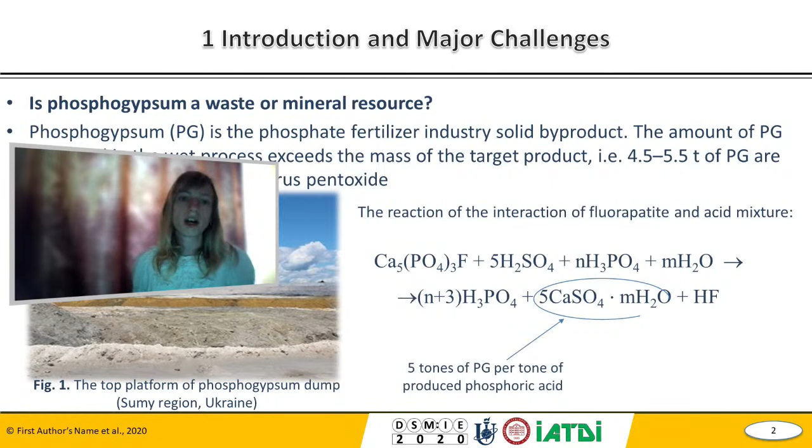I want to note about phosphogypsum as a waste or mineral resource, how we can use this type of byproduct. Especially phosphogypsum, a phosphate fertilizer industry solid byproduct. The amount of phosphogypsum grows rapidly, and now in Ukraine especially it is more than 45 million tons of phosphogypsum situated over large territories in dumps. This is not only a problem for Ukraine but now worldwide, in 42 countries phosphogypsum is dumped, and recycling of these byproducts is only maybe 10%. So it's an actual task to recycle such type of byproducts.

And now our research - next slide please - you can show aims and research tasks. Research aims: the modeling of the possibility of E. coli growth under mediums that contain different phosphogypsum doses, for environment protection purposes.

We chose E. coli bacteria as a biological object because it has very interesting industrial applications in different types of bioprocesses, especially in environment protection systems, bioremediation technologies, wastewater treatment, and destruction of hydrocarbons. So we're using this type of biological object with different phosphogypsum doses included in the mediums.

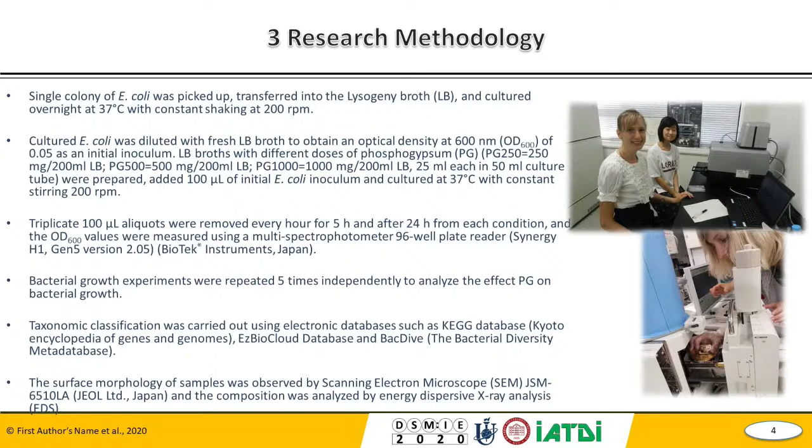It should be noted that phosphogypsum has some specific chemical features that firstly influence the evaluation of the effect on optical density estimation, because it's not very soluble, so it impacts the process of growth estimation for E. coli. Next slide please - figure 3 presents images of phosphogypsum samples and EDS spectra of the fields, from which we can understand these effects are not very easy to interpret and involve some progression and difficult conditions.

I hope it's okay and you can hear me and see my presentation. Yes?

Yes, of course. So we see the structures of phosphogypsum samples, and in these structures, gypsum crystals and silicates or aluminosilicates are included. Analysis of mineral composition is most important. Phosphorus, sulfur, calcium are presented in the phosphogypsum samples, and some contamination can be metals, ferrum, cuprum.

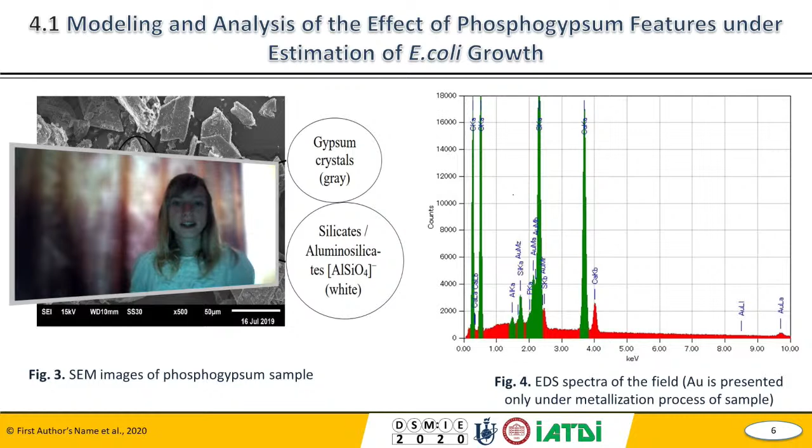What does it mean? Phosphogypsum components can be used by E. coli for its growth. It's not only precipitation in the dump.

Please show the next slide. Developing a methodological approach for estimating bacterial growth under a medium that includes phosphogypsum. For this estimation, it's needed to analyze bioinformation databases to understand the metabolic pathway of phosphogypsum conversions. This conversion is especially important to understand how bacterial growth includes these elements from phosphogypsum for safety, for nutrients, and to identify some enzyme systems involved in these processes.

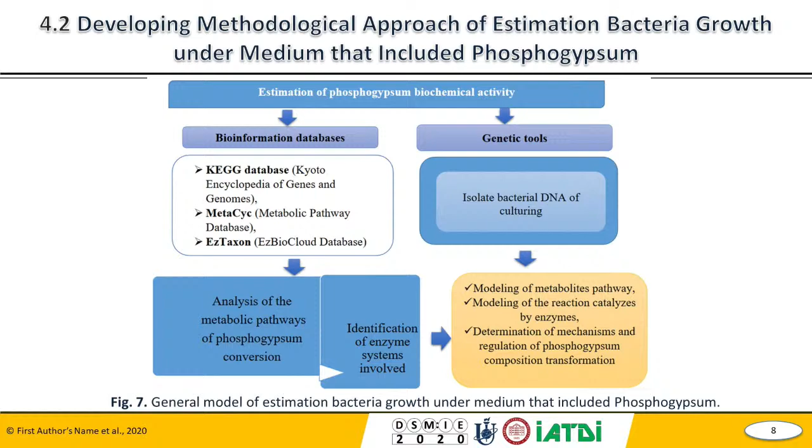So in general, if we go to the next slide, please go to the next slide. Conclusions. We have some very important summarized information and results.

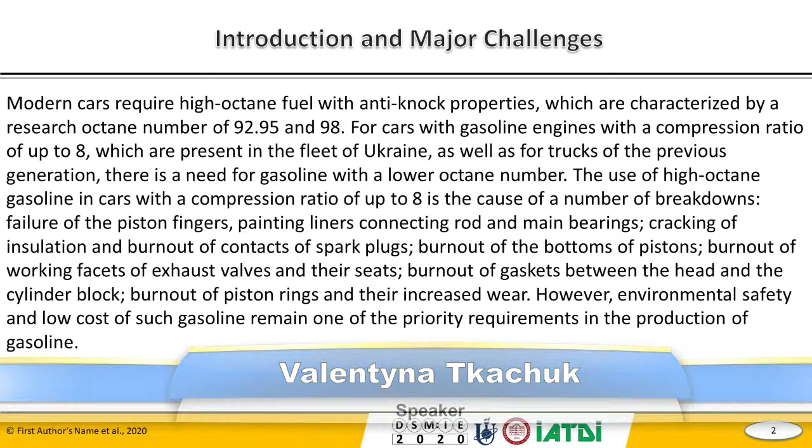The purpose of this work is to assess the effect of bioadditives on the physical and chemical properties of gasoline fractions obtained from various oils, to determine the necessary amount of bioadditives, and to achieve an octane number of 80. Estimation of parameters of operational properties for mixed fuels is performed using standard methods of investigation of physical and chemical properties of fuels, which are standard for both oil and alternative fuels.

The main advantage of gasoline-methanol fuels is the reduction of nitrogen oxides, carbon monoxide, and other harmful substances in the exhaust gases of cars. However, the use of methanol in many countries is prohibited due to its high toxicity, volatility, and increased hygroscopicity, which also creates a number of technical difficulties when using alcohol-gasoline mixtures.

Bioethanol is a less hygroscopic product, which has more heat of combustion and less heat of evaporation. It is significantly less toxic than methanol. Its advantage also lies in the fact that it is made from renewable raw materials. However, ethanol has a number of disadvantages: absolute ethanol is hygroscopic, though to a lesser extent than methanol, corrosive, and negatively affects rubber and plastic parts.

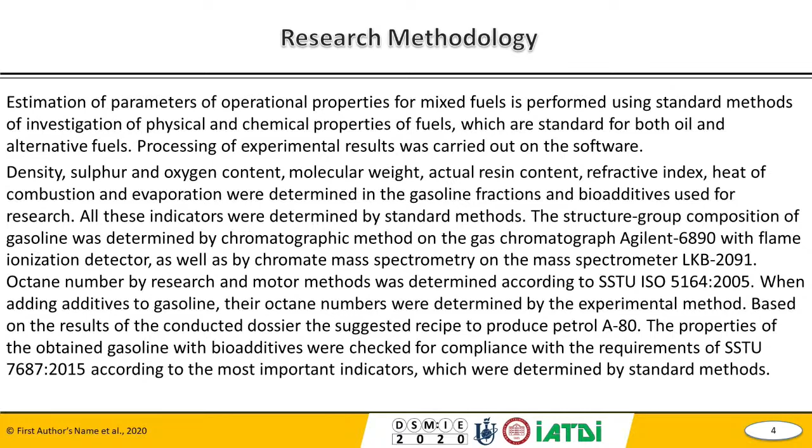Biobutanol can completely replace gasoline in internal combustion engines. In terms of technical characteristics, biobutanol is superior to ethanol: its heat of combustion is 25% greater than that of ethanol and 10% greater than that of gasoline. It is safe to use because it evaporates 6 times less than ethanol and is 13.5 times less volatile than gasoline. It does not cause corrosion.

Butanol has a low saturated vapor pressure and its mixture with gasoline is not as hygroscopic. It provides better fuel economy than gasoline-ethanol blends and will also provide lower greenhouse gas emissions into the atmosphere. However, obtaining this type of fuel is quite difficult. According to analysts, butanol can become an important part of the fuel market for transport, but currently its production is at the initial stage of development.

Isopropanol is characterized by a high maximum allowable concentration and octane rating values, and has good physical stability in mixtures with gasoline, also providing physical stability of gasoline-ethanol mixtures. The addition of 6% isopropanol increases the octane number by the motor method of straight-run fraction of gasoline by 13. And the octane number...

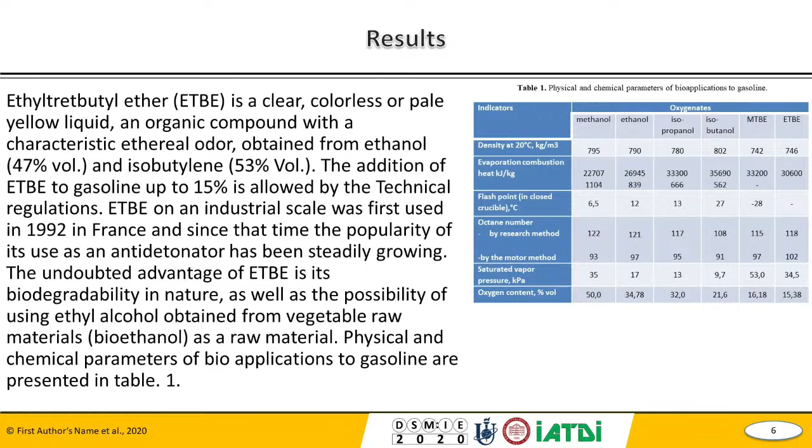Next slide. The above-mentioned bio-applications were added to straight-run gasoline in amounts reaching an octane number of 80. The results are represented in Table 2. Optimal formulations of low-octane gasoline with various bio-applications are proposed based on the prices of the components of such mixtures and the requirements for their quality.

Next slide. The lowest cost will be in a mixture of straight-run gasoline and isobutanol, despite the fact that its content in the mixture is the highest.

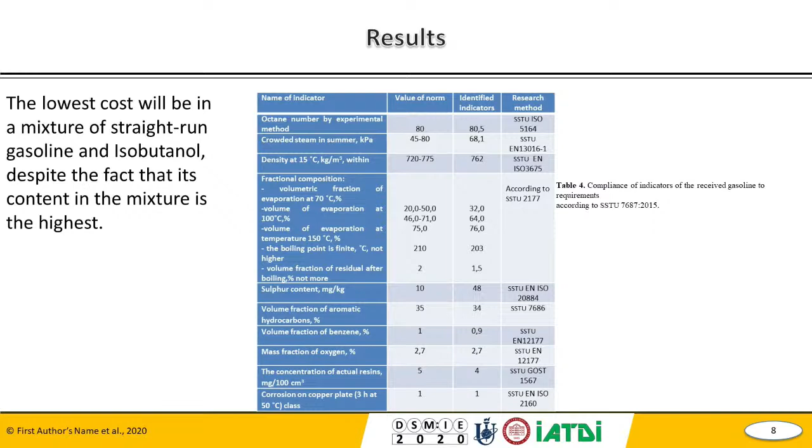Next slide. Optimal formulations of low-octane gasoline with various bio-applications are proposed based on the prices of the components of such mixtures and the requirements for their quality. The lowest cost was in a mixture of straight-run gasoline and isobutanol, despite the fact that its content in the mixture is the highest. The amount of isobutanol in the composite mixture should be left at 4%.

MTBE in the amount of 10%, then the total oxygen content will be within acceptable norms. The content of reformate in the mixture is set at 29%.

Analyzing the physical and chemical parameters of the resultant gasoline mixture, we concluded that this type of fuel meets the requirements of SSTU 7687:2015, that is, it can be used in gasoline engines of motor vehicles. Thank you for your attention.

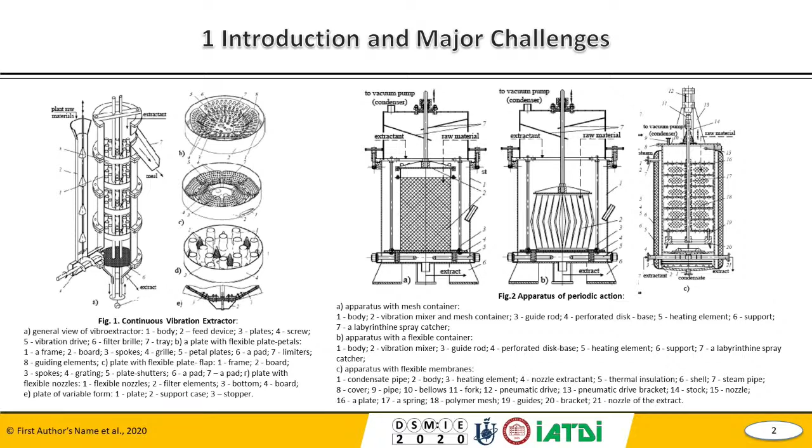Next slide. This picture shows a number of vibroextractors of periodic and continuous action developed at our department.

Vibratory extraction is a relatively new technological process. Its general theory is complex and still in its early stages of development. Therefore, the task was to substantiate the influence of low frequency mechanical oscillation generated by the drive system on the energy consumption in the conditions of vibration extraction of raw materials, and to establish regularities of how that changes depending on the design and mode parameters of the apparatus.

Next slide. Research methods include experimental and analytical modeling.

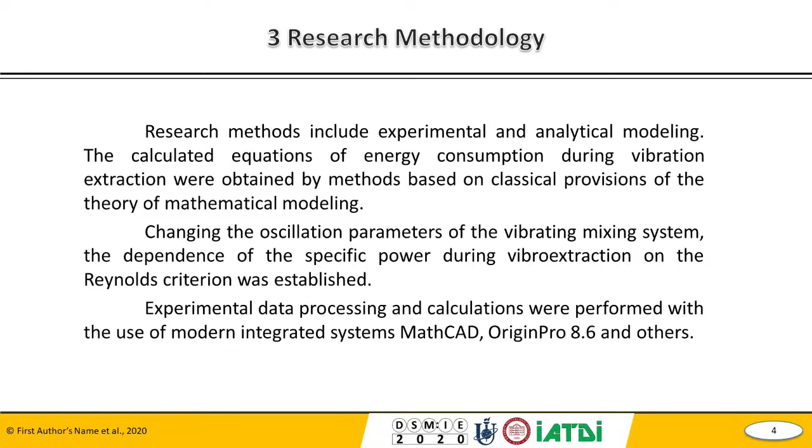The power required to perform work during vibration mixing was determined by the electrical method, taking into account the losses on the active resistance of the motor, given by the equation.

Next, on this poster we can see the scheme of the continuous vibration extractor.

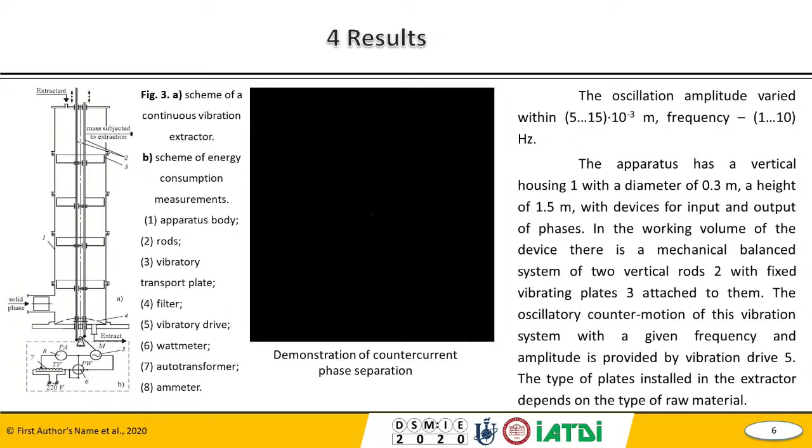The principle of operation of the device is demonstrated by the film. Plant material is fed through the loading device under the bottom plate. Under the influence of the vibrating plate and due to the difference of hydraulic resistance of the nozzles, it moves upward. The extractant is fed to the upper plate and discharged through the device.

Next, on this poster we can see the scheme of a transport-separation plate, and the scheme of movement of a working stream in transport and filtering elements.

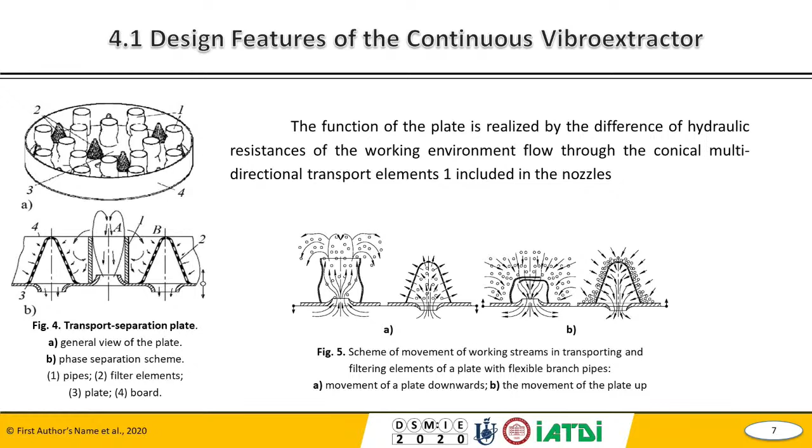The total energy consumption for the processes can be determined by the equation.

Investigation of the influence of regime parameters of the device on energy consumption. It's necessary to note that the turbulent pulsating flow generated by vibrating elements is determined by the energy parameter, and creates optimal hydrodynamic conditions for counterflow mass exchange due to intensive micromixing in the cross section of the working volume of the apparatus, which minimizes longitudinal mass exchange, while extremely high turbulence in the zone of the plate develops a larger interface, providing conditions for intensive mass exchange.

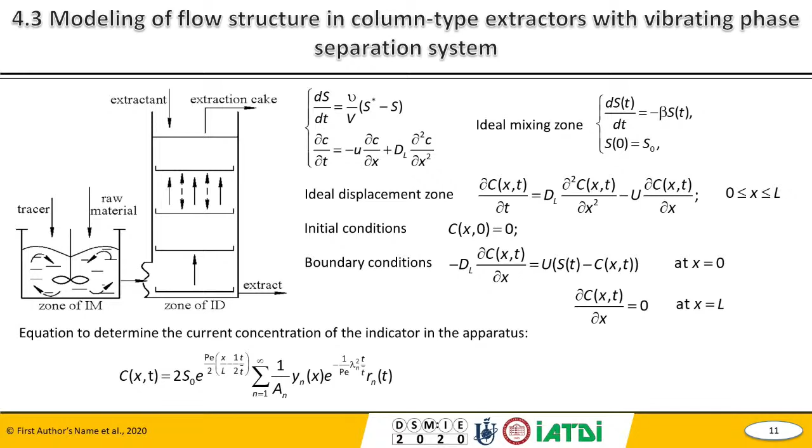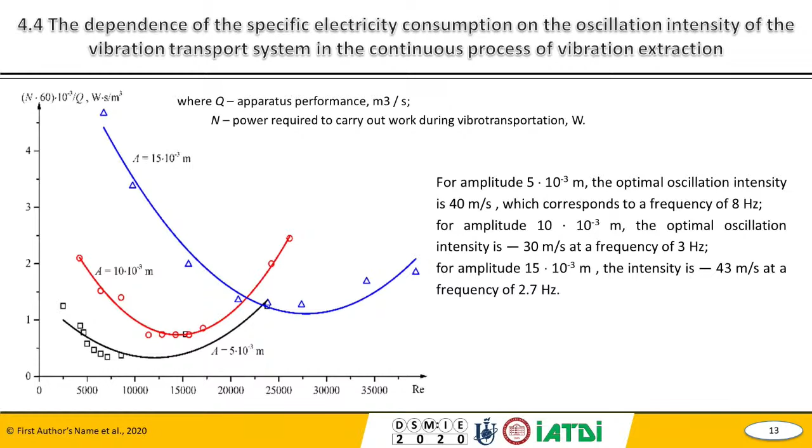Thank you, dear Professor Zavyalov, for the comprehensive theoretical and experimental research results. Your contribution to our conference series is outstanding. Just for information, last year Professor Zavyalov delivered a keynote speech. We highly appreciate his contributions.

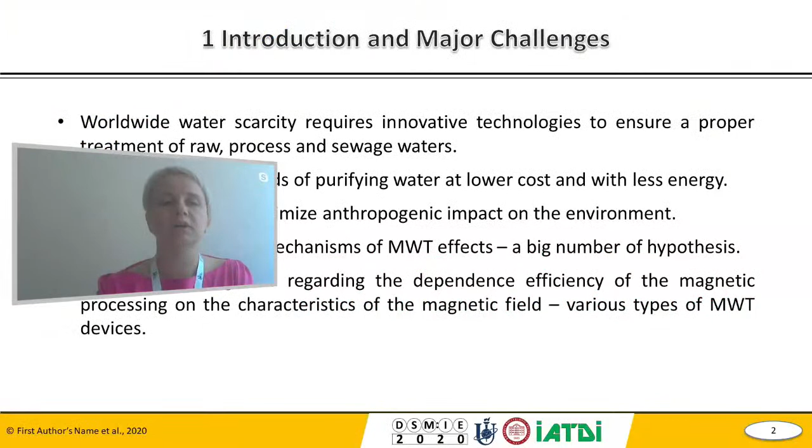Today's situation all over the world is alarming regarding great water scarcity, and this problem is relevant for all countries, both for Ukraine, Poland, and any country in the world. It requires innovative technologies to ensure proper treatment of raw, processed, or sewage waters.

To solve this problem, we need robust methods of purifying water at lower cost and with less energy, while minimizing anthropogenic impact on the environment. Magnetic water treatment is one of these promising methods. This technology isn't new, but it stays relevant.

Today, magnetic processing is widely used in environmental protection processes in European countries and America. But the main problem of magnetic water treatment implementation is the lack of studies on the mechanism of MWT effects. The magnetic field has influence on the chemical properties of water, on scale formation and morphology. It can also modify detergency and mineral fouling, and accelerate coagulation of scale-forming particles.

Results of different studies and practical experiments applying MWT prove that the effects of magnetic water treatment efficiency do not increase in proportion with the magnetic induction.

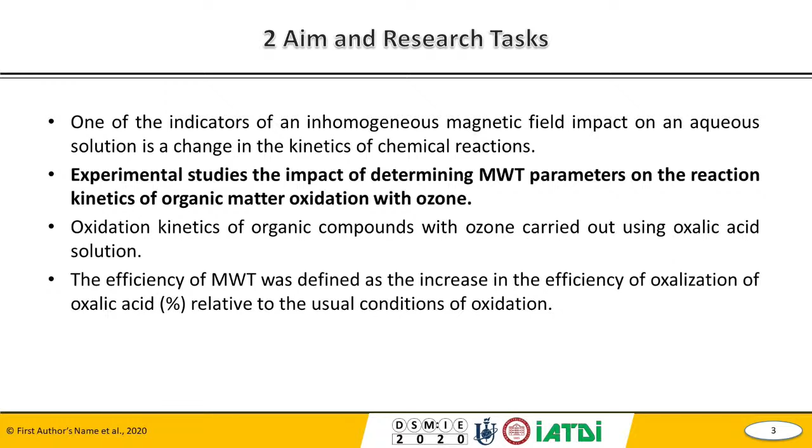For the experimental studies, a laboratory stand was made. The working solution of oxalic acid is pretreated in the magnetic field. As a result, there are physical-chemical changes in the solution, which affects the kinetics of further reactions. After the magnetic pretreatment, the solution is fed into the bubble column for the common process of ozonation.

A series of experiments were carried out according to a similar process scheme. The effect of each of the defined mode parameters was studied independently.

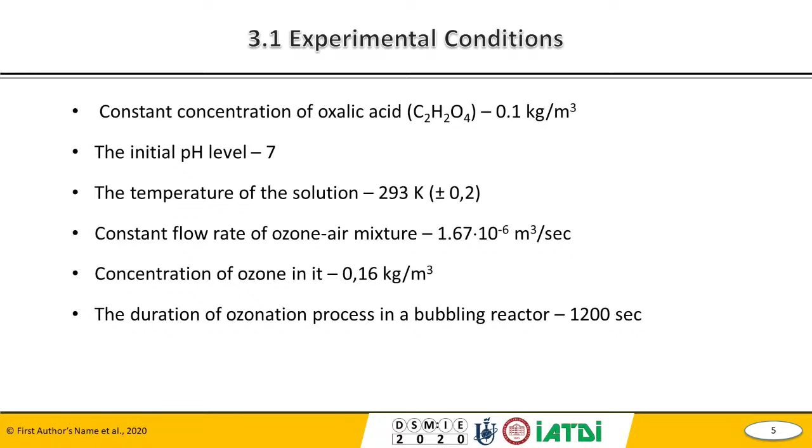The efficiency of magnetic water treatment depends on the processing time and the speed of the solution in the magnetic field. Such dependencies are complicated by design parameters of MWT devices, such as placement of magnets and the length of the section with the magnetic induction drops.

So the influence of the rate of magnetic induction change on the efficiency of magnetic water treatment was analyzed considering all these parameters and one mode parameter, the speed of the aqueous solution. The dependence of magnetic water treatment efficiency on the rate of magnetic induction changes, with consideration of the total duration of the process, was studied by the largest increase in the oxidation efficiency of oxalic acid with ozone.

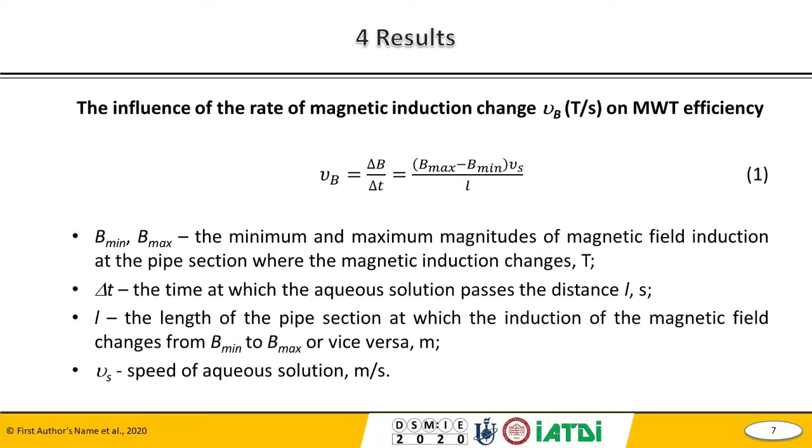The results of the control experiment were based on the oxidation of oxalic acid by ozone after passing the solution through the magnetic water treatment device without switching on the magnetic field.

The efficiency of magnetic water treatment under duration from 0.5 to 1 second does not increase monotonically with increasing value of magnetic induction change, and reaches its maximum in the range from 0.4 to 0.8 Tesla per second. The efficiency decreased due to higher magnitudes of magnetic induction, even with constant other processing factors, indicating the complexity of the relationship between efficiency and magnitude of magnetic induction.

The efficiency of magnetic water treatment also does not increase monotonically with increasing duration of the process. At constant values of magnetic induction change, increasing the duration of treatment from 0.25 to 0.5 seconds dramatically increases the oxidation efficiency of oxalic acid. At processing time from 0.5 to 1 second, the oxidation efficiency does not increase significantly, and further increase in duration is technically unreasonable.

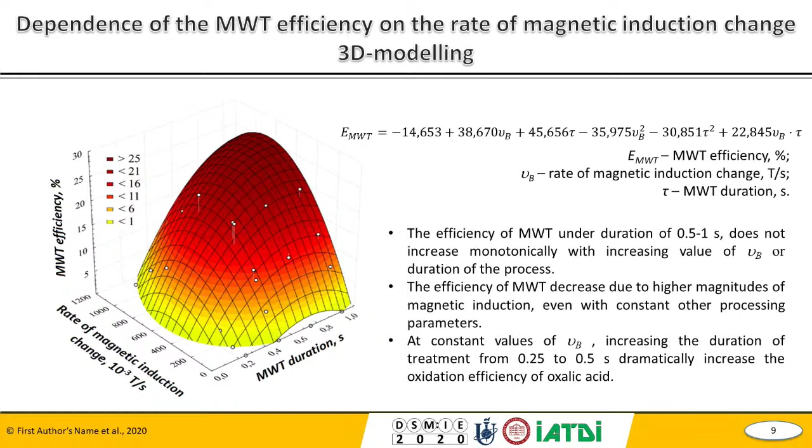The duration of the magnetic treatment has a significant effect on the intensity of the effects, and efficiency decreases using higher magnitudes of magnetic induction. Increasing kinetics of chemical reaction after magnetic water treatment can be widely used in environmental protection technologies.

It reduces reagent needs and can increase the efficiency of purification of reagent treatment process, and it can reduce the deposition on heat exchange surfaces, and help remove suspended particles from contaminated water during coagulation, flotation, or filtration processes.

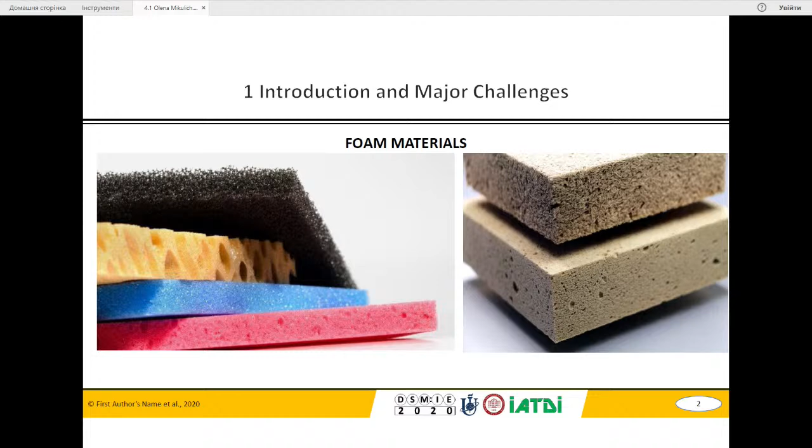Next slide, please. More studies of the effects of different types of loads on such materials are experimental. Therefore, the problem of developing a theoretical method of investigation of time variable load influence on the strength state of foam materials with defects is very important.

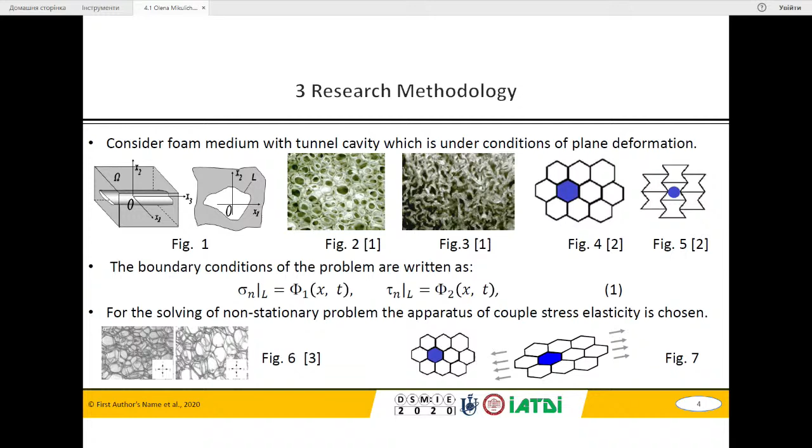Next slide, please. The motion equation in the framework of couple stress elasticity is written in form 2.

We write the displacement vector as a sum of potential and vortex functions and substitute it in equation 2. We obtain two equations of hyperbolic and parabolic type in form 3.

Using the Fourier transform for equation 3 and using the presentation for function psi, we obtain equations 4, on the basis of which we write the values of speed of shear and rotation waves in the framework of couple stress elasticity. Next slide, please.

The Fourier transform for displacement was chosen in form 5, satisfying the Fourier transforms of boundary condition 1. We obtain the system of integral equations 6 and 7, where we separate the singularities in the integration function for small values of the argument and apply Plemelj-Sokhotski formulas for limiting transition.

For the numerical solution of the system of integral equations, an algorithm was used based on the mechanical quadrature method and collocation method. Next slide, please.

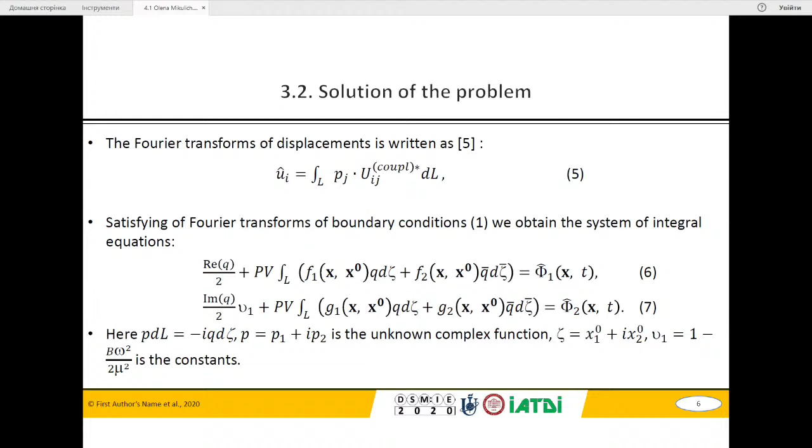For determining the hoop dynamic stresses on the boundary of the defect in foam media, we built an analytical presentation in integral form, equation 8, and for determination and investigation of the original dynamic hoop stresses, we use discrete Fourier transforms. Next slide, please.

Using the developed approach, we investigate the effect of a shock wave on the dynamic stress state of negative and positive Poisson medium with tunnel cavity, according to the model of problems in figure 8.

For numerical calculation, we use the elastic constants obtained by Vox, Rueger, and Lakes, required to describe an isotropic Cosserat elastic solid. Structures of positive and negative Poisson foam are shown in figures 9 and 10, and values of these elastic constants are presented in the slide.

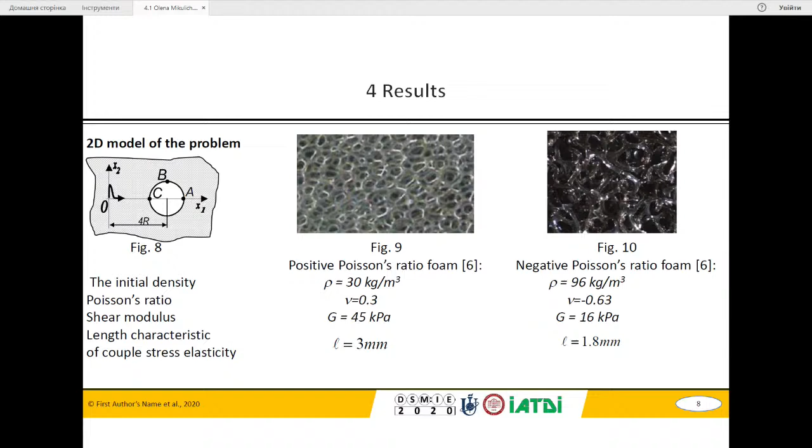Foam with positive Poisson ratio was modeled using cellular elements. Foam media with negative Poisson ratio was modeled using reentrant elements.

Comparing the numerical results shows that the maximum values of normalized hoop stresses at the boundary of the cavity are smaller by 2.4 times in material with negative Poisson ratio than in materials with positive Poisson ratio. Besides, the distribution of hoop stresses along the boundary of the cavity is substantially different for materials with negative Poisson ratio.

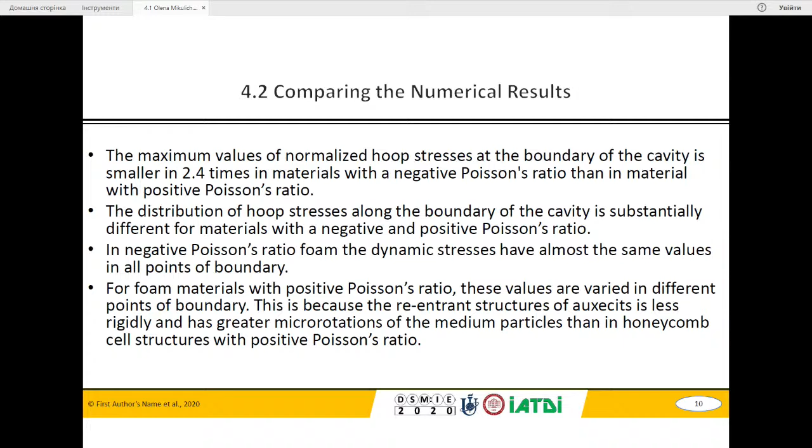All mentioned results of the comparing numerical calculation of dynamic hoop stress are presented in this slide.

Second, based on numerical calculation, the dynamic stress state of structurally inhomogeneous materials depends not only on physical characteristics of the medium, such as density and Young's modulus, but also on internal structure, whose influence is determined by the Poisson ratio.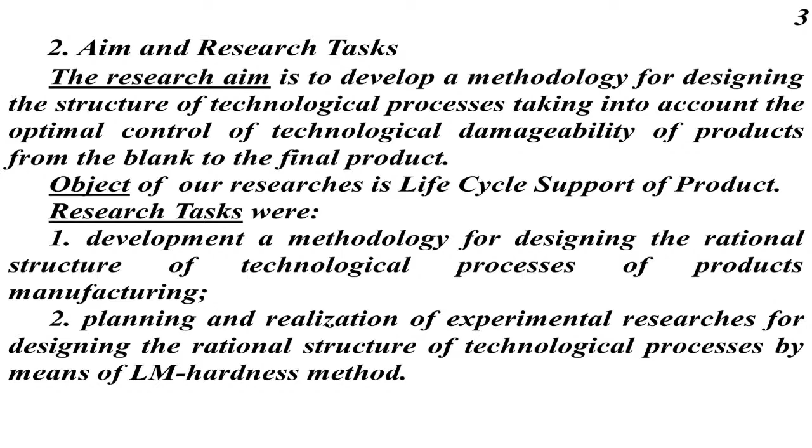The rational structure of technological process is analyzed by means of the LM-hardness method. We use the LM-hardness method to analyze the physical heterogeneity of the blank material structure. Next slide, please.

According to this method, the degree of dispersion of the characteristic of the material and structure state, and material mechanical properties after operation time at various stress levels, is taken from the measurement results performed by identical devices and identical conditions, rather than the absolute value, is used as a parameter of damageability.

The scattering of the measurement results performed by identical devices and identical conditions is more representative regarding the correlation of the mechanical properties of the material and the structure state than the absolute values of the characteristic.

This method is easy to implement using hardness as a mechanical characteristic. The hardness value is used for indirect evaluation of properties. Homogeneity is the parameter that integrally characterizes the state of the material during processing, based on the results of hardness measurements.

Homogeneity is estimated by the Weibull coefficient M. A higher value of the coefficient M corresponds to lower hardness dispersion and a lower degree of damageability. We propose to use the technological damageability W, described by means of energy approaches to the process of damage accumulation, as a criterion for analyzing the process during blank machining.

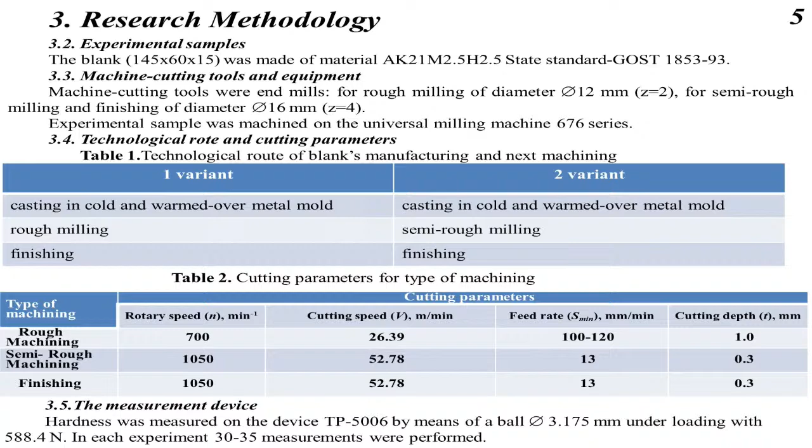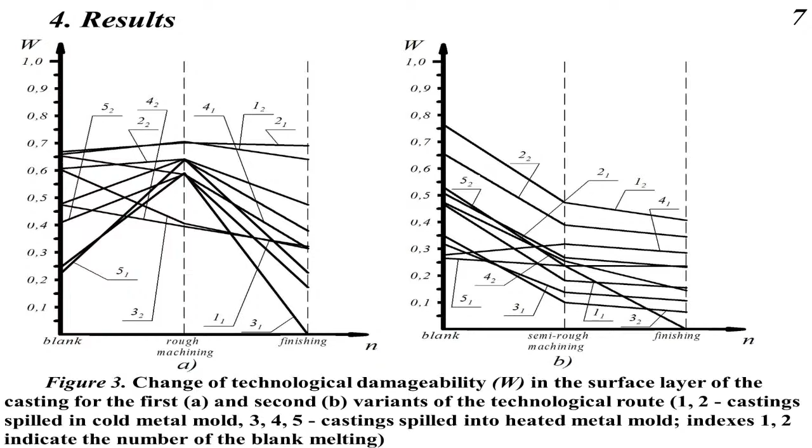Next slide, please. The main results you can see on this slide and another slide.

We propose to design the rational structure of the technological process of product manufacturing by means of the LM hardness method. Using the technological damageability W as a criterion for analysis during blank's machining, we can choose the optimal technological operation during process manufacturing, determine the layer of product material for cutting during manufacturing, and predict the behavior of product material during substages and stages of the life cycle support of the product.

Next slide, please. The main conclusion you can see in this slide.

Technological damages on the surface layer of the part during blanking operations and after machining should be analyzed by the hardness dispersion. We propose to use the technological damageability, described by energy approaches to the process of accumulation of damage, for the process analyzed during blank's machining.

Further research should be carried out for a wider nomenclature of products and materials to introduce the proposed technique, into the practice of modern mechanical engineering production.

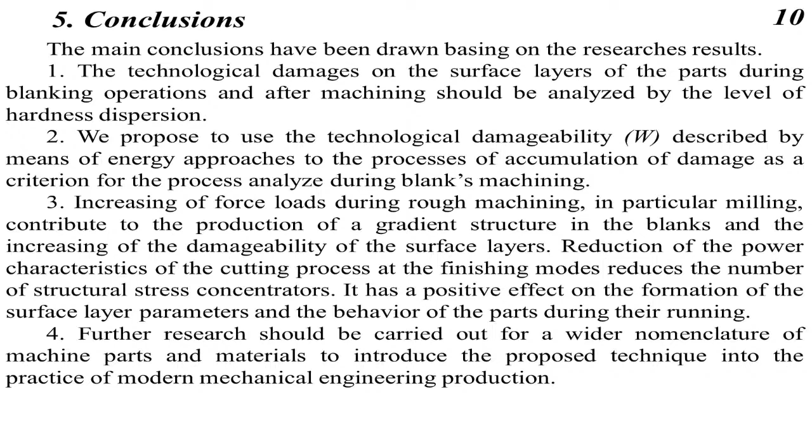The presentation is finishing. Thank you for your attention.

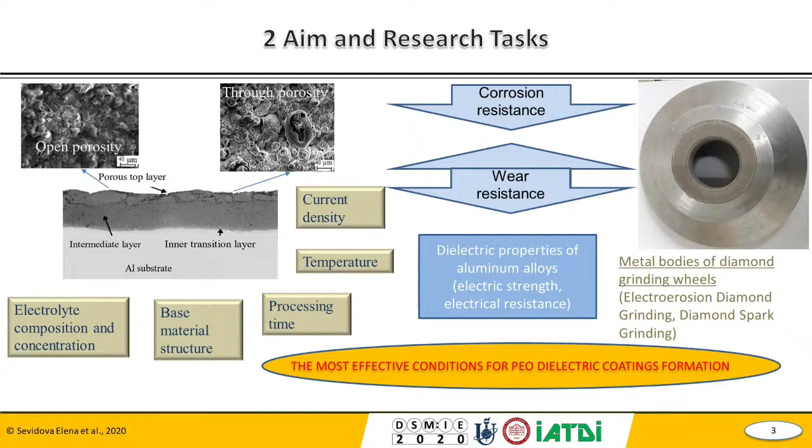Our coating thickness was measured with an eddy current thickness gauge. The results were from 30 to 45 micrometers. The most important thing for us was the indication: how can we see porosity?

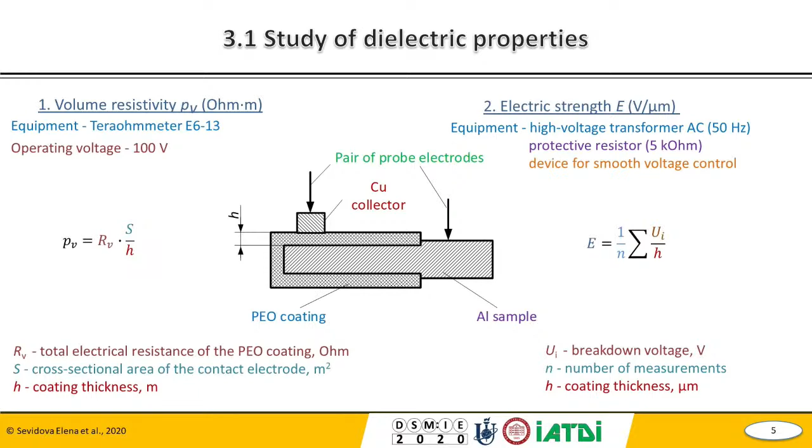After such research, we started to research our dielectric properties.

Please, slide 8. It can be also seen that there is a good correlation between these measurements, our morphology, and the dielectric properties.

For example, the lowest volume resistivity we have is in samples with the biggest and largest amount of through-porosity.

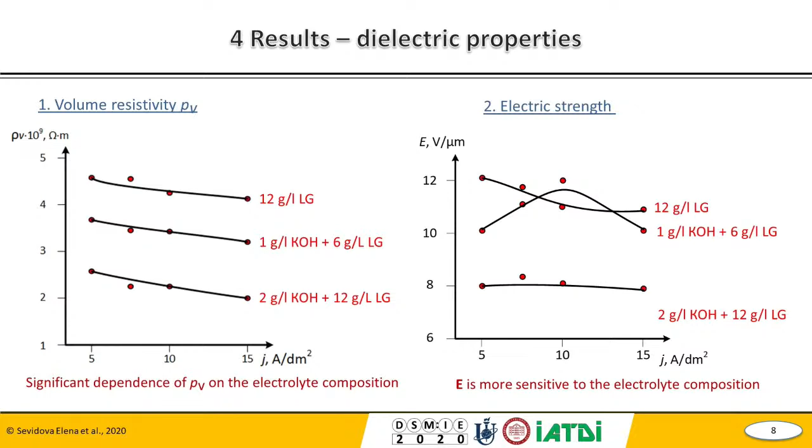It can be seen that we have a qualitative correlation between the nature of the through-porosity in the coatings and the electric properties of our aluminium samples.

Increased porosity is one of the major factors for decreasing our dielectric properties.

For future production, it could also be interesting to use our 12 gram per liter liquid glass solution as a technical solution for achieving the best results in dielectric properties.

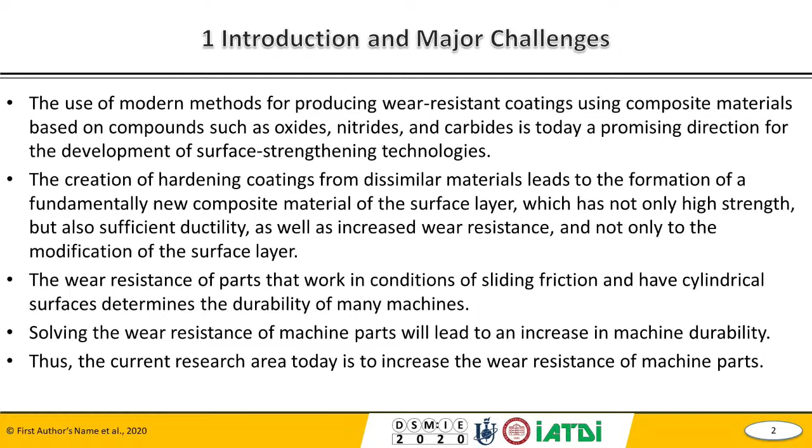Slide 3, please. The purpose of the work is to analyze thermomechanical processes in the treatment of cylindrical surfaces with wear-resistant coatings. To do this, we perform the following main tasks: to develop an analytical model for determining the thermomechanical state of the working surface of a cylinder with a wear-resistant coating having sections of partial delamination during application.

Consider the possibilities of technological support for the quality of finishing of the working surfaces of cylinders using wear-resistant coating material. To determine the influence of cylindrical grinding processing regimes with a wear-resistant coating on its physical and mechanical characteristics.

Slide 4, please. Determine the dependence of the stress intensity factor on the delamination angle alpha and the roughness of the working area of the cylindrical surface. Determine the effect of particles on the wear resistance of the coating deposited by the electrochemical method.

Carry out tribo-corrosion studies of composite materials based on nickel titanium dioxide obtained by electrochemical deposition. And the last one: determine the dependence of the formation of cracks on the surface of the processed surface on the cutting depth and characteristics of the tool.

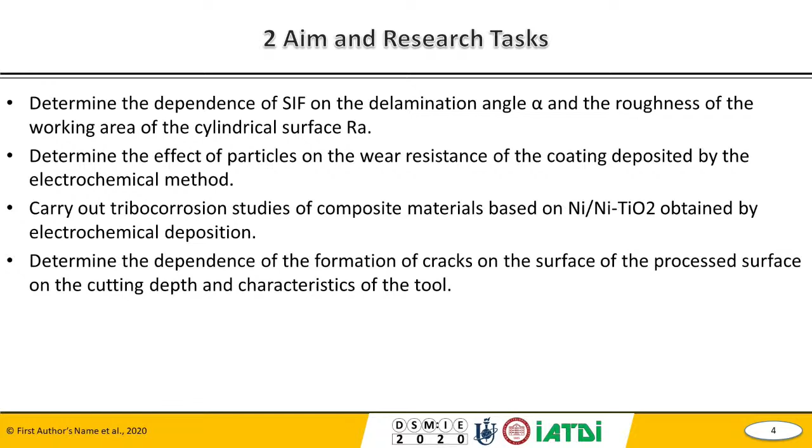This slide shows the influence of various processing modes of work surfaces with a wear-resistant coating, which provides the necessary roughness to maintain the functional properties of the coating.

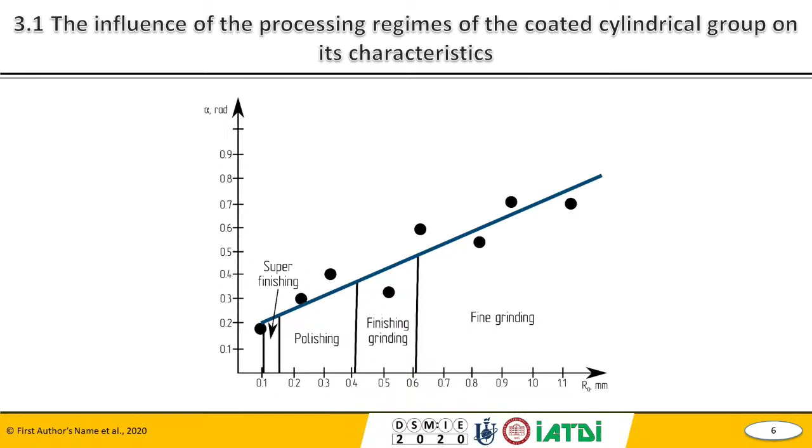Slide 7. Using the correlation between the roughness of the working zone of the cylinder and the size of the delamination area of the coating during various finishing operations such as super finishing, finishing grinding, and polishing, the dependence of the stress intensity factor on the delamination angle alpha and the roughness of the working zone of the cylinder surface was found.

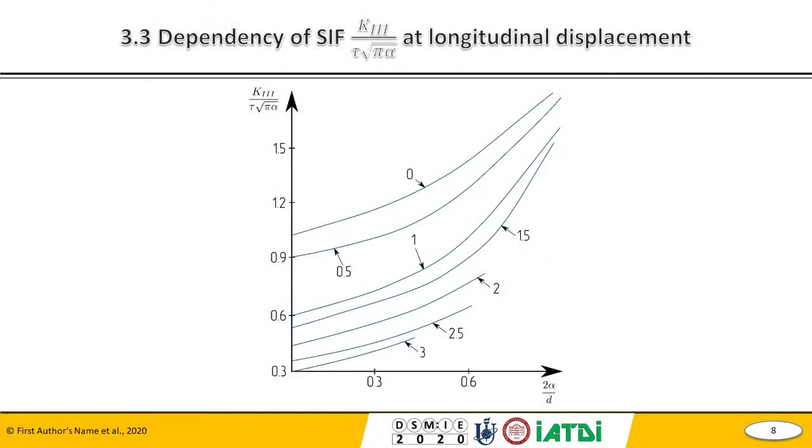Slide 8. Dependence of the stress intensity factor on the relative distance between the sections of delamination during longitudinal shear. In the case when, due to the roughness of the working surface, there is a system of sections of delamination of coating from the base material, it's possible to change the stress intensity factor due to their mutual influence.

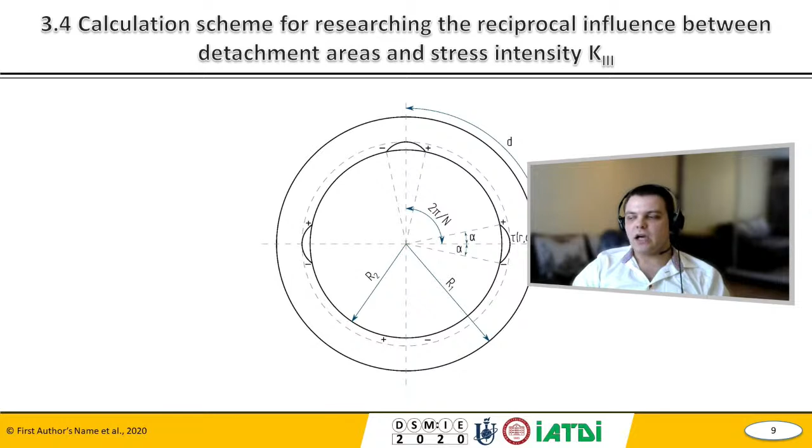Slide 11. To confirm the analytical model, several model experiments were carried out. For this, a wear-resistant nickel titanium dioxide-based coating was applied to duplex steel by electrochemical deposition. It should be noted that the application of the wear-resistant coating to duplex steel was accompanied by some difficulties associated with the distinctive properties and characteristics of duplex steel itself, which added to the desire for a more detailed study of this issue in future.

Electrochemical deposition of coating was carried out using the Autolab scientific complex and NOVA software with the following parameters, which you can observe on this slide. To save time, I will not stop on this slide in detail.

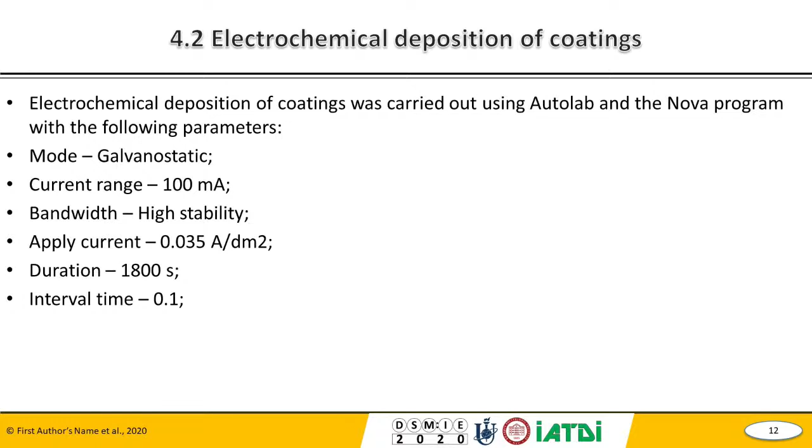Various grinding wheels were used to determine the dependence of crack formation on the depth of cut and the characteristics of the tool. The distribution of cracks on the surface of wear-resistant coating treated by grinding, depending on the depth of cut and the characteristics of the tool, is shown in this figure. The figure shows that the most productive tools for processing wear-resistant coating while maintaining its quality characteristics are number 6 and number 7, which allow us to process the surface at greater depths of cut.

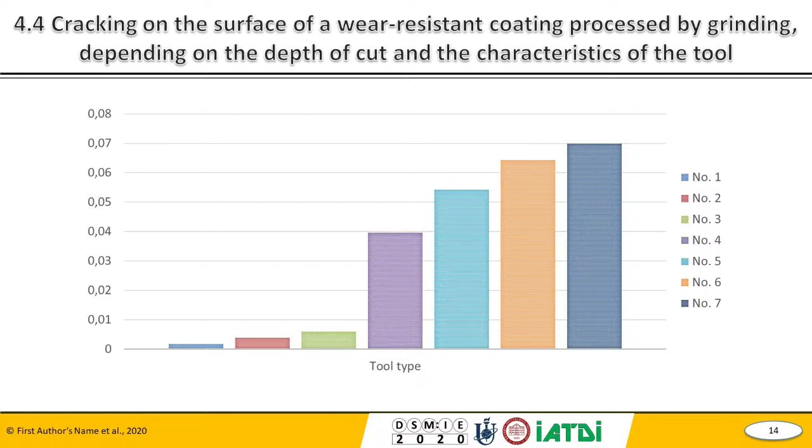Short conclusions. An analytical model has been developed to determine the thermomechanical state of the working surface of a cylinder with a wear-resistant coating, having partial detachment areas during application.

The possibilities of technological support for the quality of finishing processing of cylinder working surfaces using wear-resistant coating materials are considered. The influence of cylindrical group processing regimes with wear-resistant coatings on its physical and mechanical characteristics is determined. The dependence of the stress intensity factor on the delamination angle alpha and the roughness of the working area of the cylindrical surface is presented.

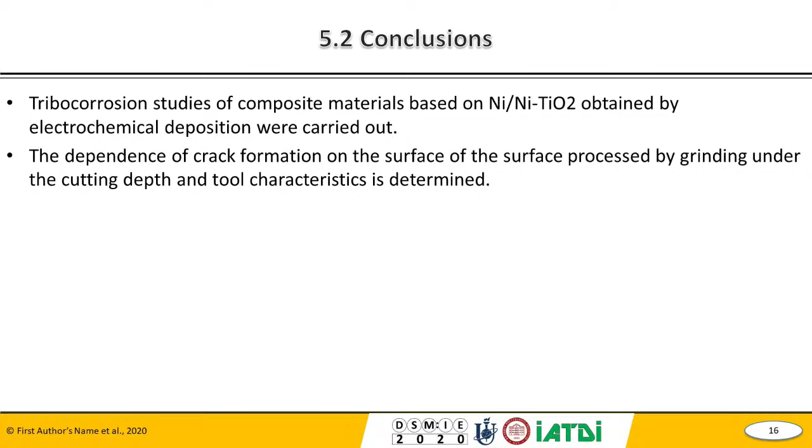The effect of particles on the wear resistance of the coating deposited by electrochemical methods is dependent. Tribocorrosion studies of composite materials based on nickel titanium dioxide obtained by electrochemical deposition were carried out. The dependence of crack formation on the surface processed by grinding under the cutting depth and tool characteristics is determined.

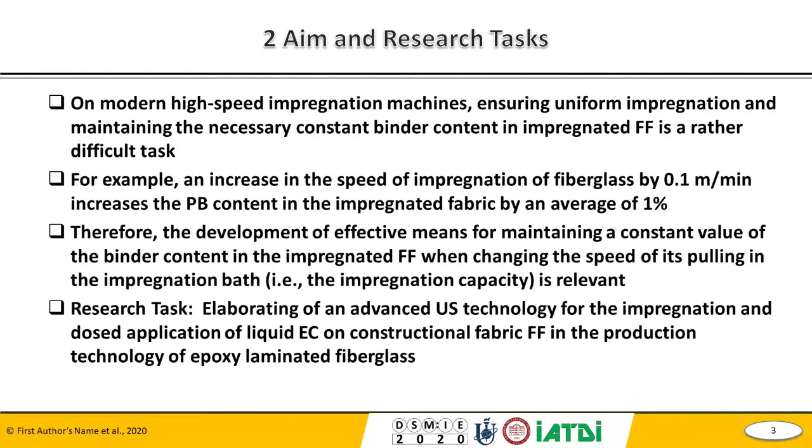Measured parameters for dosing application: the epoxy composition was preliminarily sonicated for about 30 minutes, at a temperature of sonication from 60 to 70 degrees Celsius. The temperature of the epoxy binder in the impregnation bath was about 30 degrees Celsius. Ultrasonic frequency was calculated from 18 to 22 kilohertz, with the shown intensity and amplitude parameters. A more important parameter is fabric material pulling speed, from 0.01 to 0.035 meters per second. The next important parameter is epoxy composition content in the impregnated fiberglass, which was from 35 to 40%.

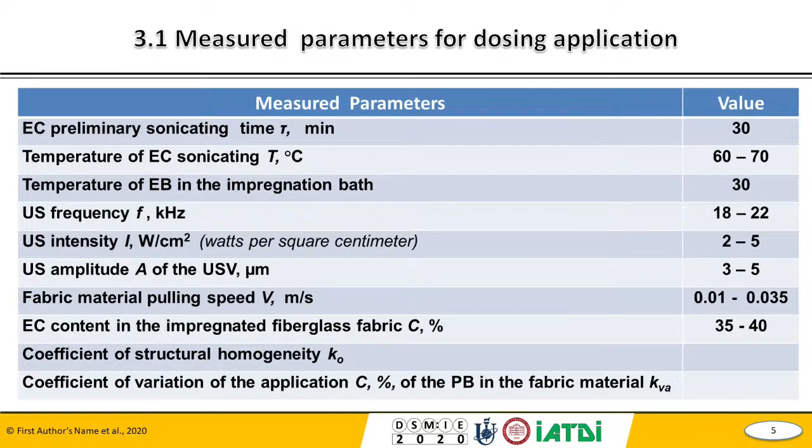The next slide presents a different arrangement scheme of the emitting plates of the dosing device relative to the impregnating fabric filaments.

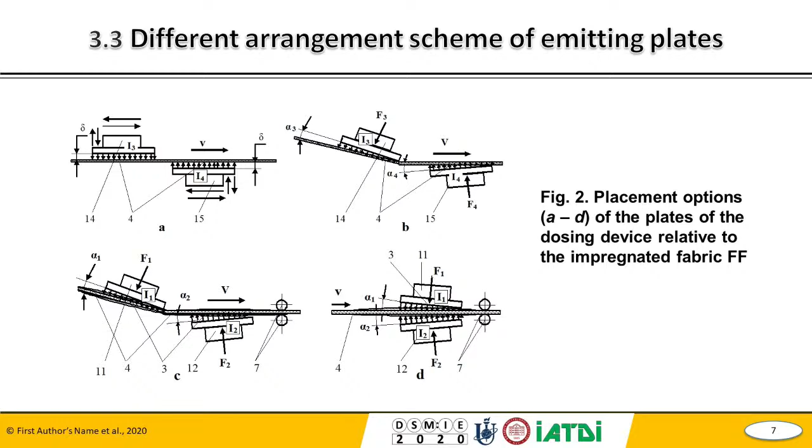Results of dosing application are presented on the next slide. We can see parameters including the content of polymer binders and the coefficient of homogeneity, the coefficient of content of epoxy polymer binders. These results can be seen on the next slide.

In the table, a technology comparison chart shows the amount of polymer binder applied to fabric materials when the polymer binder content is 35%. A more important indicator is drawing speed: for traditional technology it is about 0.012 meters per second, but according to the developed technology we can increase it by more than 2.5 times. This is important because it increases the productivity of our technology.

The next important parameter is the application variation coefficient. For traditional technology it is about 18%, but according to our technology it is in the range of 4 to 5%, so it decreases by about 4 to 5 times. We can also increase the viscosity of our polymer composition by more than 20 to 30%.

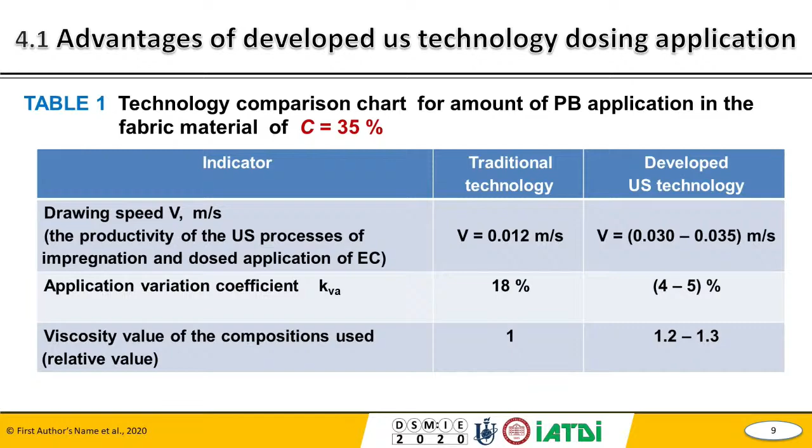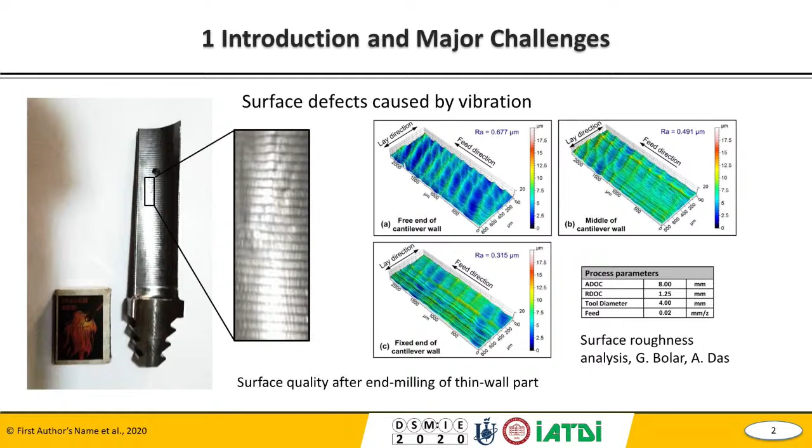It proves that stiffness distribution isn't uniform. In these terms, the support of such critical zones is interesting to investigate. Next slide, please.

Other factors of deflection are cutting force and heat transfer. Rational use of coolant plays a significant role in reduction of thermal deflection. In this research, we focused more on vibration and force impact.

Aim and research tasks: we formulate the fluid jet support model, and we need to investigate the advantages of fluid jet support, the application of smoothed-particle hydrodynamics in modeling, and as a result, we'd like to theoretically predict the oscillation amplitude for conventional machining and machining with fluid jet support.

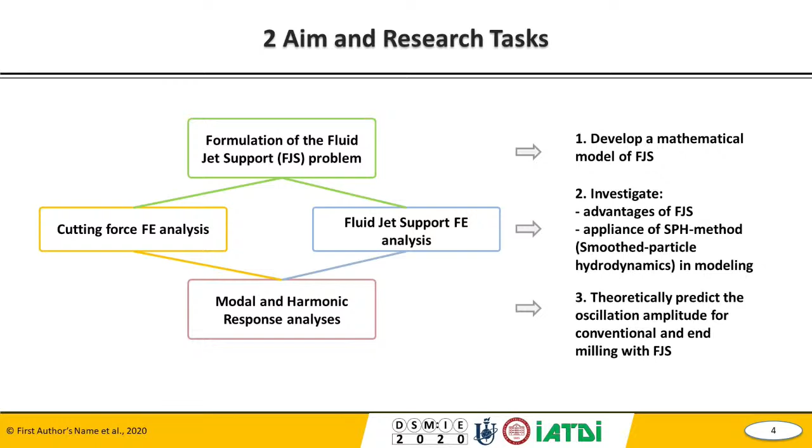Research methodology. There are 4 steps in the research methodology. We perform deflection force analysis, cutting analysis, modal and harmonic response analysis. On the first stage, we get the impact of the jet on the thin-walled element. On the second stage, we get cutting forces and stresses. In the modal and harmonic response analysis, we get oscillations and natural frequency, and as a result we can estimate the oscillation amplitude for both conventional machining and machining with fluid jet support.

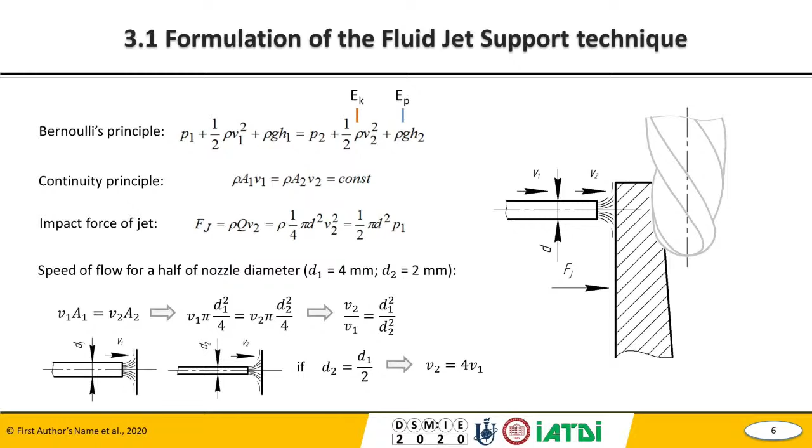Next slide, please. Theoretical possibilities of implementation. First of all, the major impact of fluid jet support is an increase in natural frequency. There's also reduction of temperature in the cutting zone and an increase in part deflection resistance. There is existing equipment, for example, for breaking of the chip during machining, so the units that can supply such high pressure are commonly used in production. Another point: using optimized nozzles with a small diameter gets the flow closer to steady laminar flow, and the smaller the nozzle diameter, the higher the flow speed, resulting in lower energy consumption.

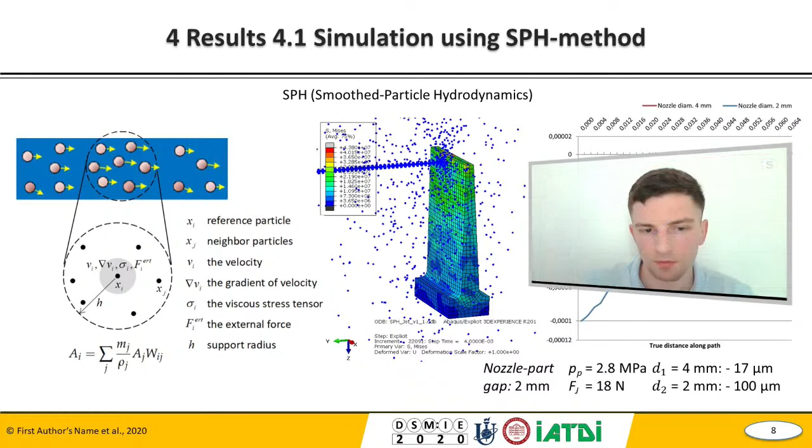The input parameter was pump pressure, and the gap between the nozzle and the wall was 2 millimeters.

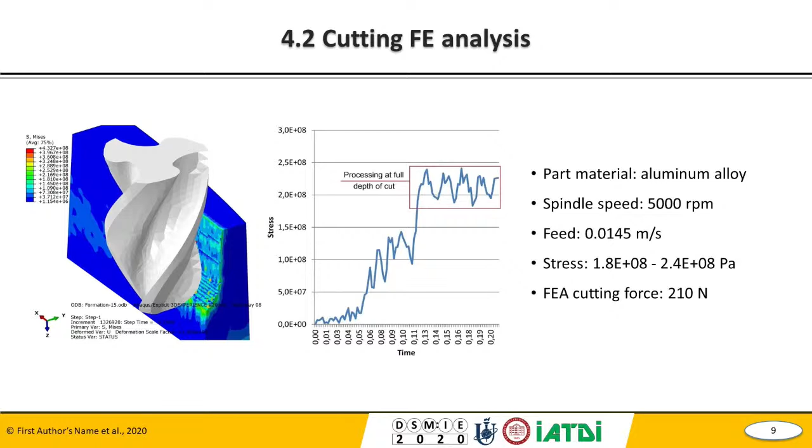Next, the modal and harmonic response finite element analysis. The main goal of the harmonic response analysis was to prove our assumption that by applying additional support, we not only decrease the amplitude of the oscillation under external cyclic load, but it will also lead to a shift of the natural frequency of the structure. Consequently, we get more frequency space for the cyclic load without negative resonance impact.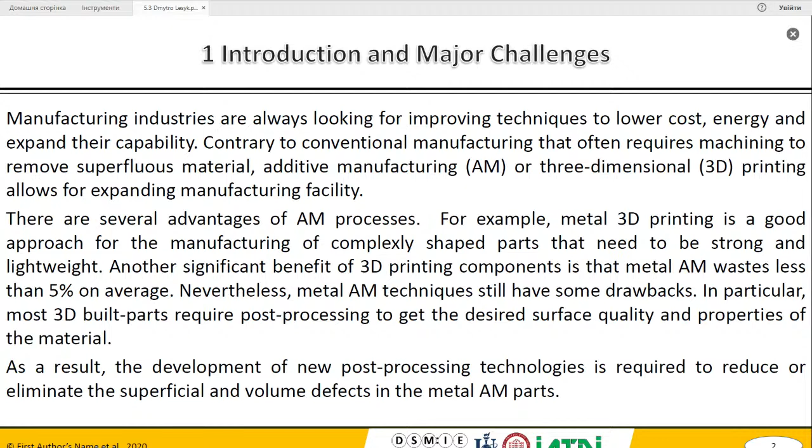So the aim of this work is to develop a thermomechanical technique for the post-processing of nickel-based alloy parts fabricated by selective laser melting process. And the research tasks are the following: study the surface texture, analyze the surface roughness parameters, and evaluate the surface hardness.

So in particular, in this work, a nickel-based Inconel 718 powder with particle size distribution in the range of 10 to 55 micrometers was used as feedstock material. The nominal chemical composition of the powder used is given in Table 1.

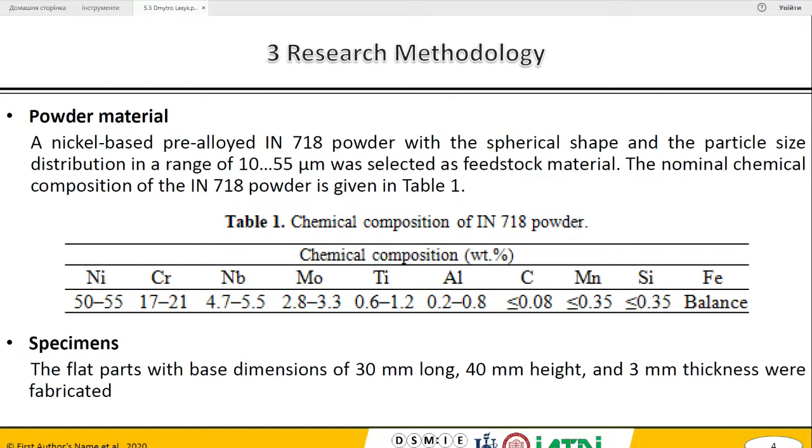In particular, the flat parts were fabricated by selective laser melting technique using a laser power of 200 watt, laser spot of 70 micrometers, and laser scanning speed of 700 millimeters per second. A general view of the SLM machine and scheme is presented on the slide.

To eliminate internal porosity and increase density of material, all SLM-built specimens were subjected to hot isostatic pressing treatment. The heat treatment consisted of a heating temperature of 1160 Celsius degrees and a pressure of 160 megapascals for 3 hours.

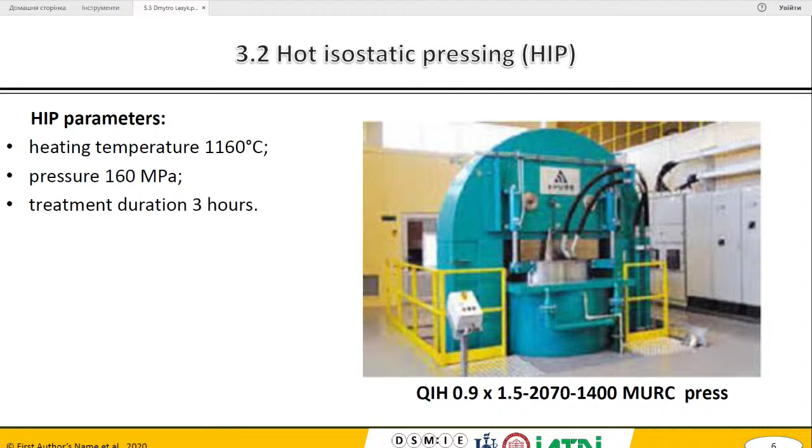Then the HIP-processed specimens were subjected to both a double aging process and homogenization heat treatment, followed by double aging heat treatment according to a standard. In particular, the homogenization heat treatment was performed at a heating temperature of 1180 degrees Celsius for 1 hour using a vacuum furnace. The aging heat treatment parameters are listed on the slide.

So, two mechanical post-processing techniques, such as conventional shot peening and ultrasonic impact treatment, were applied with optimized parameters for surface treatment of heat-treated specimens. The schemes of the shot peening and ultrasonic peening process are shown on the slide.

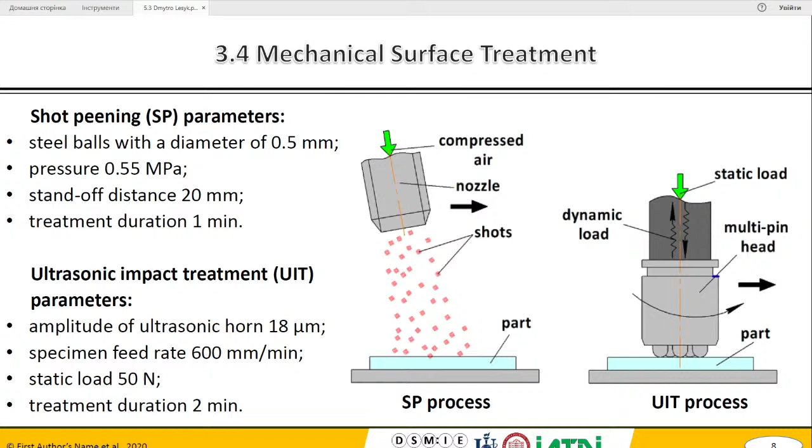Surface topography of the SLM-built and heat-treated specimens is given on the slide. It can be seen that manufacturing surface defects such as ellipsoid or spherical balls, partially melted powder particles, open pores, as well as signs of laser tracks, remain on the surface after post-heat treatments.

Both shot and ultrasonic peening after heat treatments led to a significant change in the shape of the surface profile, forming a new wavy microrelief. As compared to the shot peening process, the ultrasonic process on the right side forms a regular microrelief with smoother surface roughness and lower surface waviness, owing to application of the multi-pin ultrasonic tool, which produces sliding impacts of pins on the specimen surface due to forced rotation of the impact head.

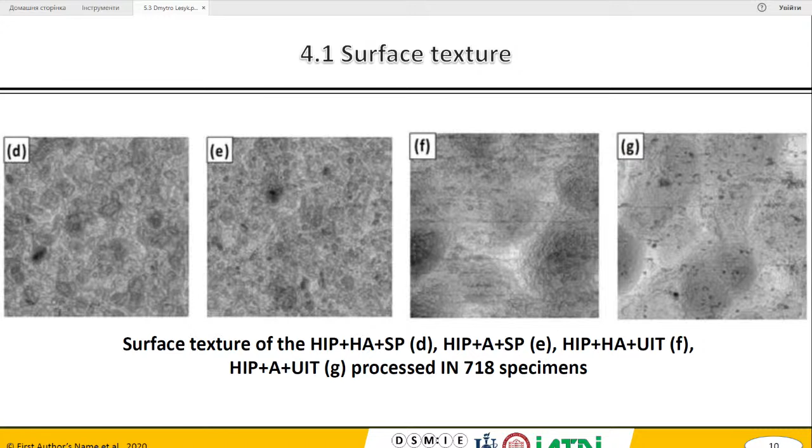At the same time, the maximum height parameter of the ultrasonic processed specimens was decreased by approximately 4 times in comparison with the heat-treated specimens.

The surface hardness of the SLM-built specimens is increased after application of post-processing techniques. In comparison with the heat-treated specimens, the surface hardness in the near surface was increased by 20% after the ultrasonic impact treatment, while the shot-treated specimens is slightly higher than that of the UIT processed specimens.

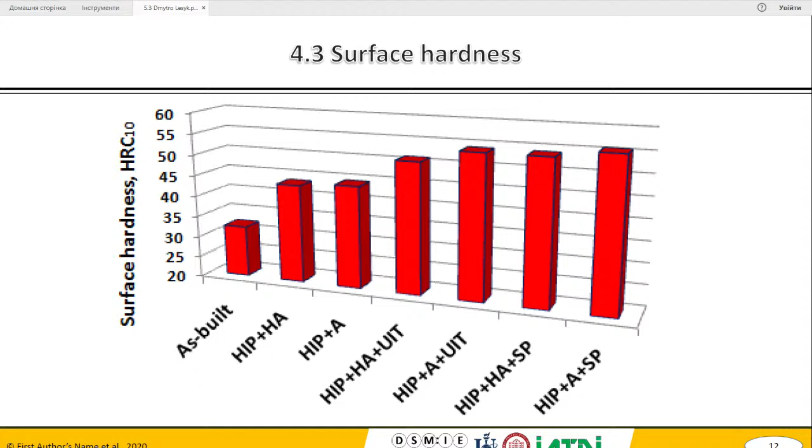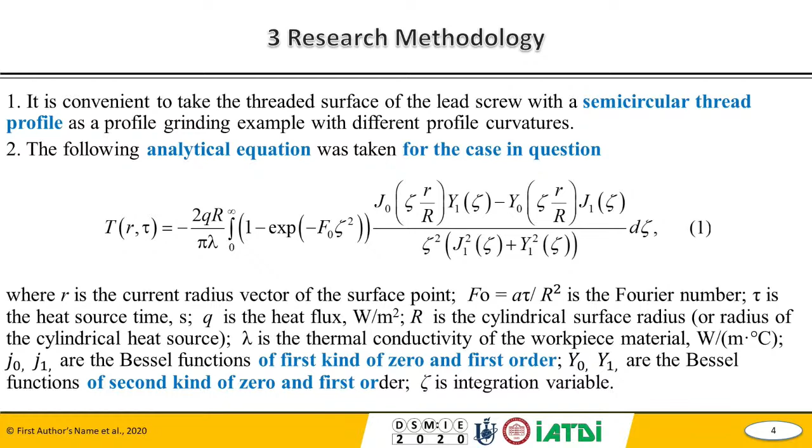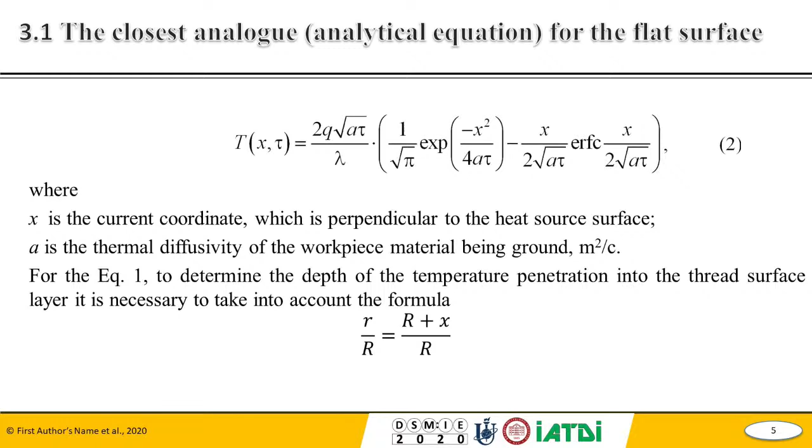A is the thermal diffusivity of the workpiece material being ground. For equation 1 to determine the depth of the temperature penetration into the thread surface layer, it's necessary to take into account the formula. Next slide is number 6.

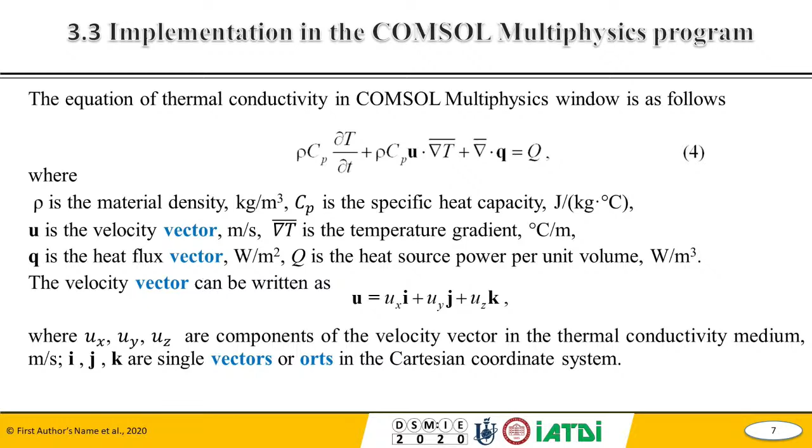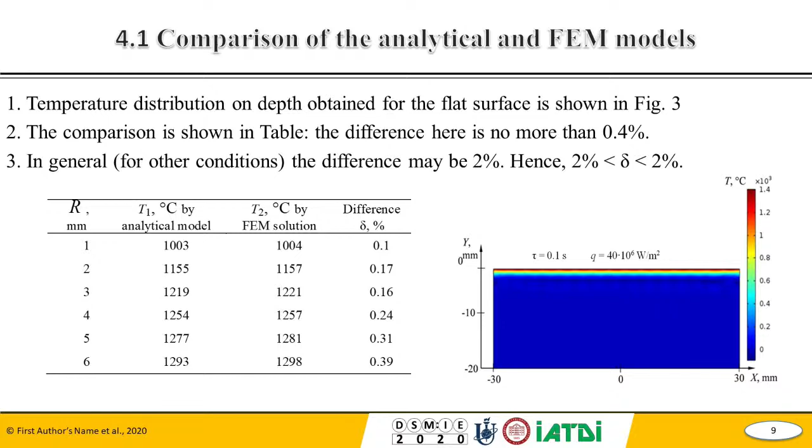Shows comparison of the analytical and FEM models. The first point is temperature distribution on depth obtained for the flat surface is shown in figure 3. Second, the comparison is shown in the table. The difference here is no more than 0.4%. And third, in general other conditions, the difference may be 2%. Hence, the difference may be from 0.4 to 2%. The next slide, please, number 10.

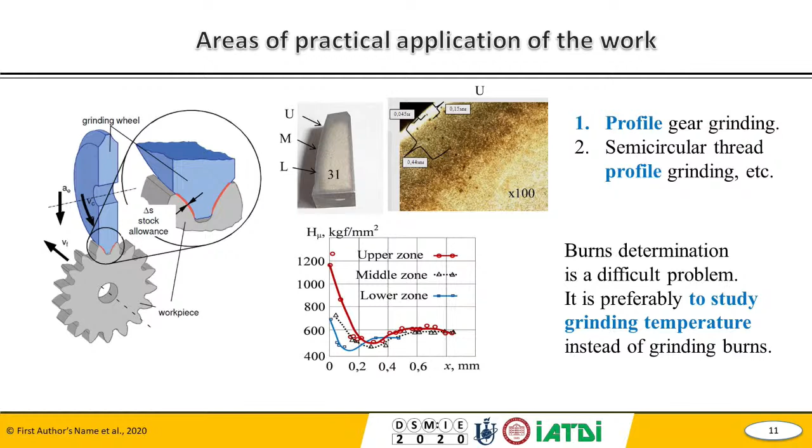And the conclusion: burns determination is a difficult problem. It's preferable to study grinding temperature instead of grinding burns. The next slide, number 12.

Some technical problems. Professor Larsen was missed, unfortunately, and unfortunately we lost our connection. Then, where is our connection?